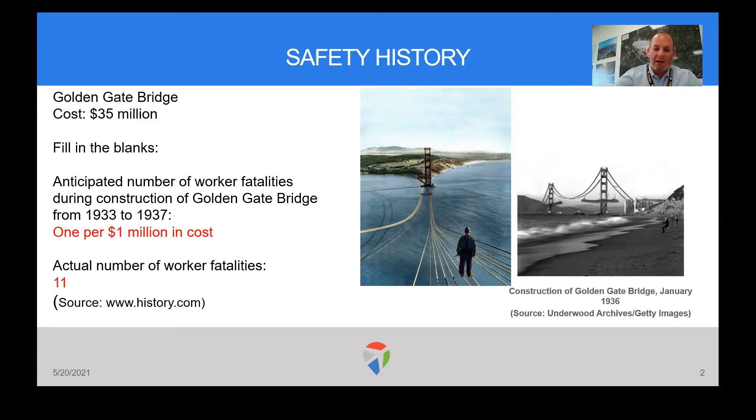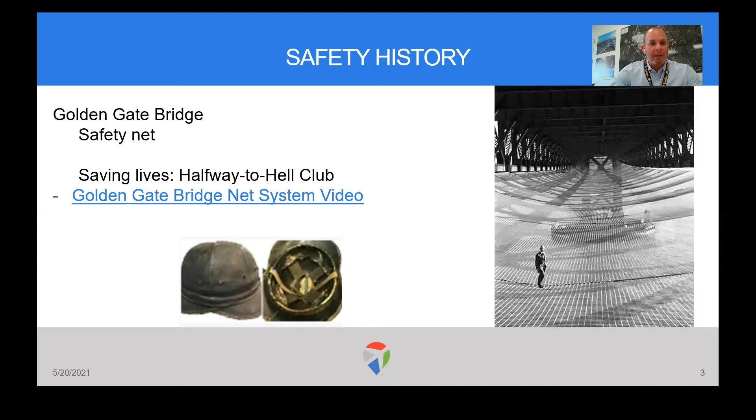And how they did that was the owner, a guy by the name of Joseph B. Strauss, made it a top priority to make sure that safety was implemented on his project. He did two key things. Number one, he implemented the use of a hard hat. This is the first construction project ever to use a hard hat during construction operations. And also he implemented a net that went the entire span of the Golden Gate Bridge, and that net saved many, many lives during the construction process.

Let's test your knowledge a little bit. I want everybody to take a second and rank these 6 items. What is the average rank of priority given to each of the following criteria by architects and design engineers? Take a moment and think of or write down your answers. Is it A, quality? Is it B, end user safety? Is it C, cost? Is it D, schedule? Is it E, aesthetics? Or is it F, construction safety? I'll pause here for a second.

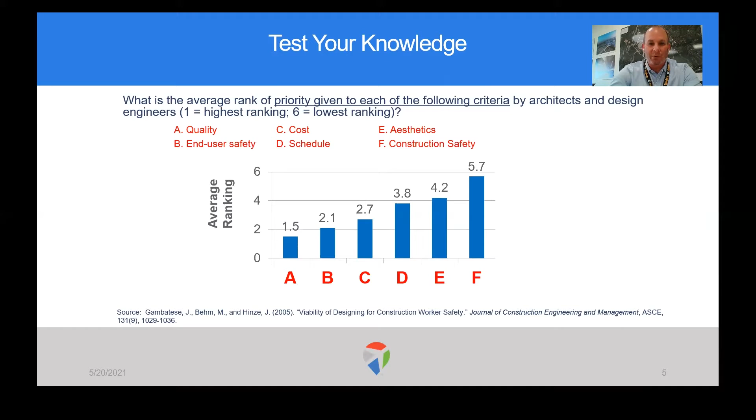Okay, the answer is easy. It's A, quality is the highest priority, and the last, number 6 on the list, was construction safety, which was the lowest priority considered by architects and design engineers.

What we're here to talk about is prevention through design and moving safety upstream. How can we think outside the box? The definition of prevention through design encompasses all the efforts to anticipate and design out hazards to workers in facilities, work methods and operations, processes, equipment, tools, products, new technologies, and the organization of work. We want to make sure we look at safety differently on our projects.

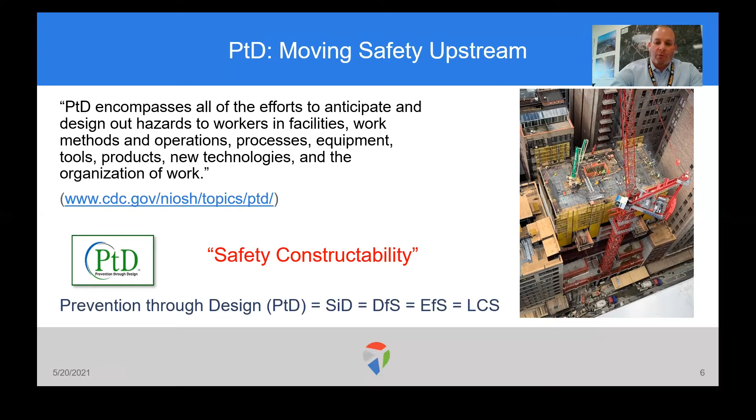Looking at prevention through design, I like having the first example, Thomas Jefferson's home in Monticello, located in Charlottesville, Virginia. On the roof of this building Thomas Jefferson actually implemented a handrail back in 1782. That is a very early version of prevention through design, one that we could get a lot of use of on all of our projects today. And he had the forethought back in 1782 to implement that.

This is an important diagram. I've worked 25 years in the environmental health and safety world for construction. Typically, in my past life, we wouldn't get called out onto the project until we were in the yellow, the 2 to 3 years of construction operations. The fences would go up and you'd get a call and say, hey, Jason, it's time for you to go out to the project. We're starting construction.

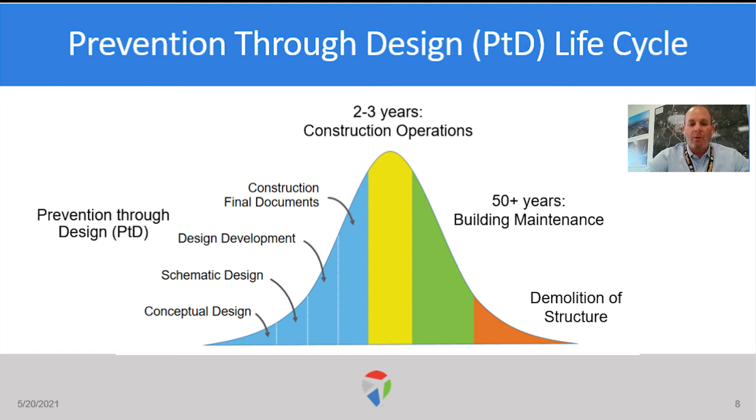Realistically, and thinking outside the box, this has to be a holistic approach. How can we get involved with our design teams and our architects very early on, as far back as the conceptual design, to start having conversations, to start looking at the safety of the construction workers who are building the project and the 50+ years that building has to be maintained? We can get involved in the conceptual design, the schematic design, the design development, and lastly, the final construction documents. It's all about having conversations very early on.

My second example. I worked for a company in my previous life that was based out of the Nordics and Europe, and they have a much more robust prevention through design program in place. These three pictures show hand placing concrete and the hazards that present themselves. You think about housekeeping. That's the obvious hazard. You look at slips, trips, and falls, same level. If an employee is going from location A to location B, he's walking in a hazardous condition.

You look at any type of back injuries from all the lifting you have to perform to hand place concrete. You're looking at pinch points, the hazards with using tools, and dropped objects, things that fall off the building. As you can see here, when I was working for that company and looking in their prevention through design manual, on page 1 it said smart concrete forming methods shall be utilized on all projects.

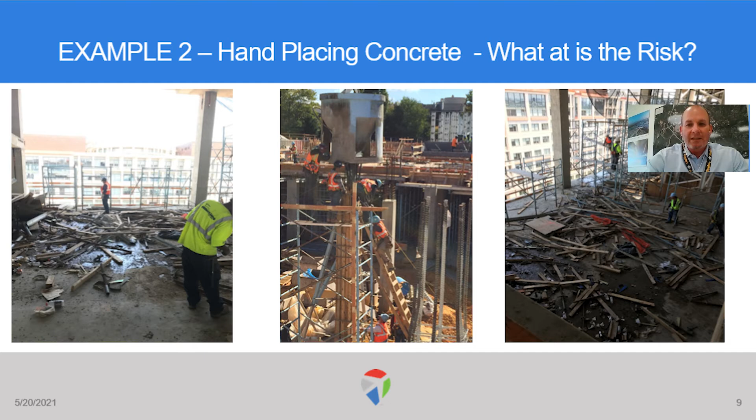And that's an eye-opening statement, and it's something eye-opening that we can take as an industry. This is low-hanging fruit that we can try to implement. And I go into having tough conversations. And about this one particular topic of smart concrete forming methods, what are the 3 key hurdles? 1, not dictating means and methods. 2, the legal liability. And 3, not having this written into our contract with the architect teams.

And the first one, not dictating means and methods, we're not trying to tell you what to do, but we can use our experience to educate, teach, and coach to make them make that decision, either the concrete contractors or the general contractors, or just using all of our knowledge to have them make the right decision to protect the worker. And that's what this is about.

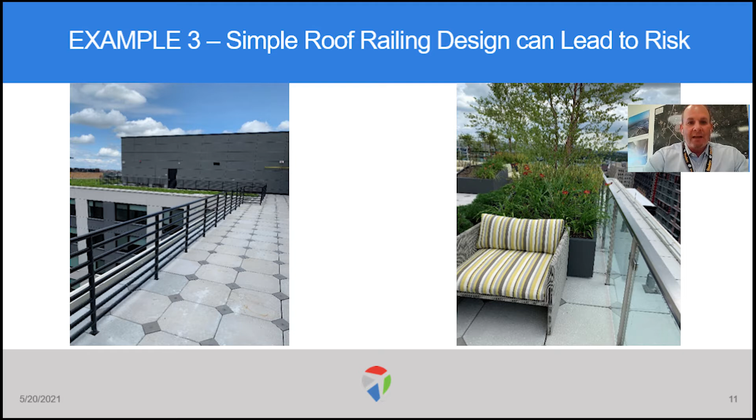Another example is the simple roof railing. Look at the hazards that are presented with a simple roof railing. The picture on your left is a residential building. And what's that handrail look like to you? What's that handrail look like to a child? It's a ladder. It's called a ladder type guardrail or a ladder type handrail. So obviously that is a hazard presented and something that could be looked at and designed out very early on.

The picture to your right, also, and I think looking at little kids, and I start thinking of little kids and my children, what's that look like to a child? It looks like you climb up on that planter and jump over this rail. This is the same building. It's 12/13 stories. This was in downtown Washington, D.C., but these are hazards that could have easily been designed out with an early conversation.

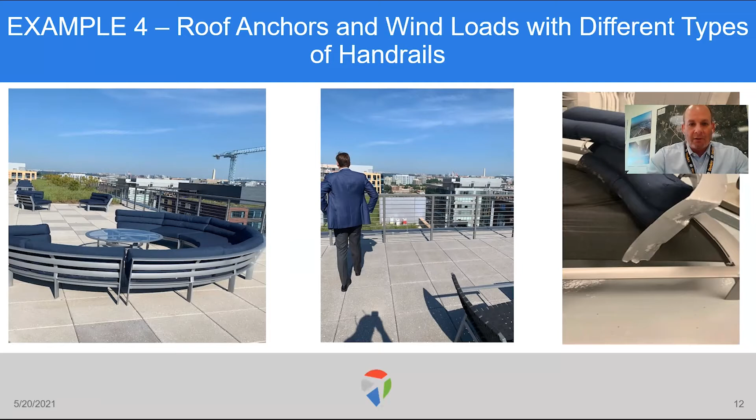Also, what we found was, looking at this ladder type handrail that they had on this building as well, it increased the wind load coming through or off that roof because the wind blew through that rather than having a glass rail where it would blow over. But again, another simple conversation could have eliminated this risk.

This is something we see all the time. And with ladders last and companies eliminating ladders on their project, looking at the ability of floor design to support construction live loads. You got to think of your buildings. How can you have a more robust floor slab? And this floor slab that can be used, or you can put equipment on that and you wouldn't have any concerns.

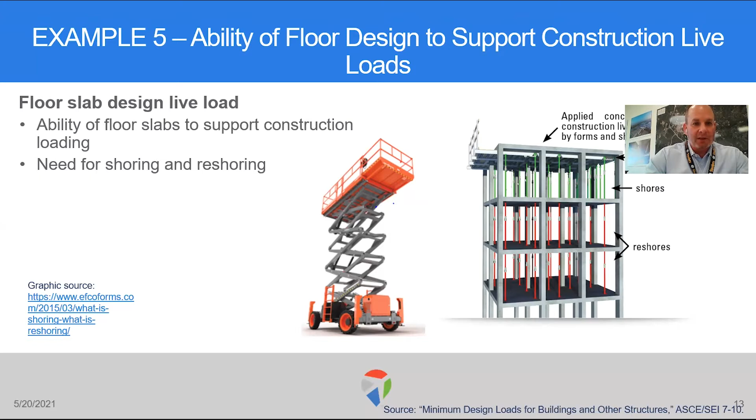So during our prevention through design workshops that I was part of with Dr. John Gambatese, some of the questions, this was brought up a few times by superintendents in the field, like how can we make more robust floors? How can we support the equipment we're going to put on each floor and make sure that we are thinking this through in the very early phases. But again, another piece of low-hanging fruit that we can have a conversation with our design teams.

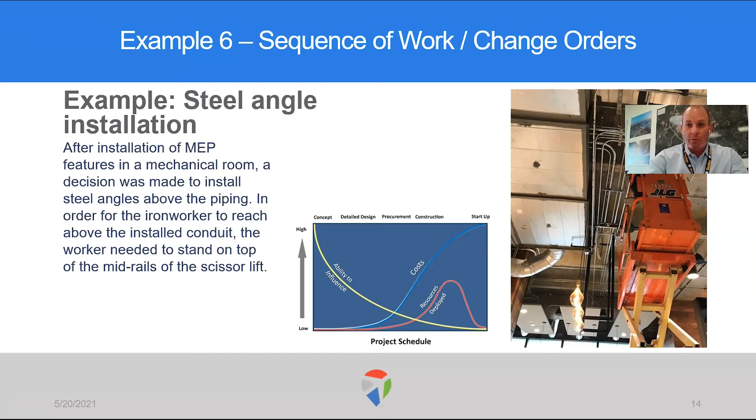How about sequencing of work and change orders? And how many times in the field have you seen workers go up on mid rails of scissor lifts? Basically, it's either because the sequence of work wasn't right or there was a change order. And you look at the ability to influence in the smaller photo here. When a change order comes into place, the cost is going to be elevated, and it's going to create that much more risk for the workers out in the field. So taking a good hard look at sequencing of work and also considering change orders and the hazards they present to the workers.

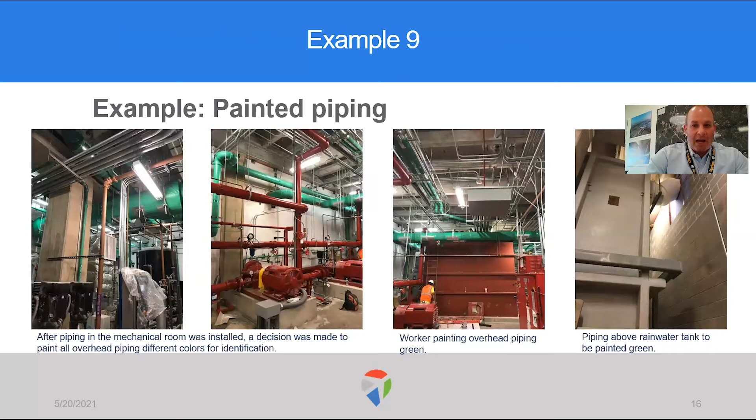The next example is painting pipe. And you think about painting pipe, yes, that is a prevention through design method. But if they ask you to paint the pipe after it's installed, that's the exact opposite of prevention through design. That is creating risk for your workers. So looking and considering, this was a change order that they decided to paint the pipe after it was already installed, and it created immense amounts of risk for the workers.

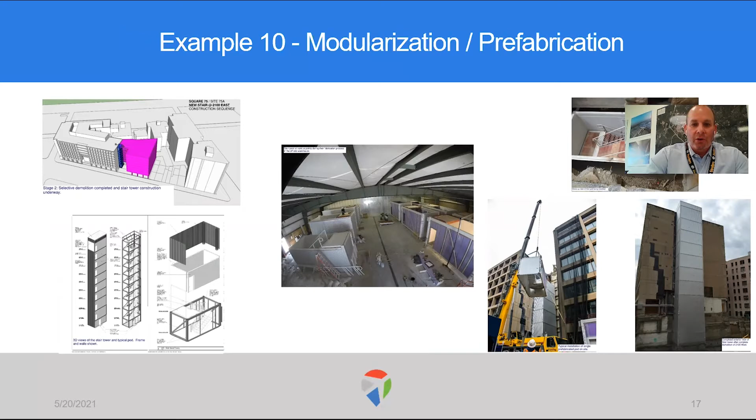Another great prevention through design method is modularization and prefabrication. This can eliminate risk when you construct something off site and then bring it to your structure and implement it. This is one of the key elements that they use over in Europe. It's something that we should consider on our projects.

Okay, dropped object protection. If you're going vertical, there is a lot of risk generated by dropped objects. And how can we take a good hard look at that? If you're using the engineered forming methods and engineered forming techniques, using the Doka forms, the Peri forms, you can come up with a cocoon system to eliminate, number one, workers being exposed to the edge, and number two, things falling off your building. These systems work. Again, it's not for everything.

If you're building a 10 to 15 story building, is the cost worth putting in a cocoon if you have that money? Yeah, but when you're going seriously vertical, 25, 30 stories and up, a cocoon system should be strongly looked at. It can help speed up production. It can eliminate things falling off the building and also eliminate workers in their leading edge work.

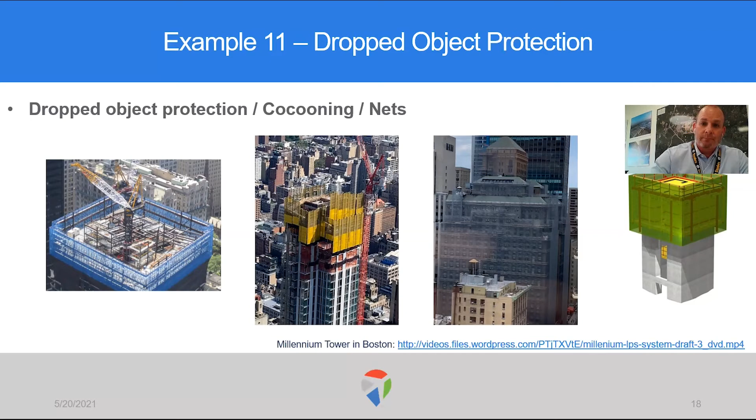Okay. Looking at dropped objects and what else can you do? Looking at leading edge protection, if you can't use a cocoon system, the leading edge protection, number one, it's safer. Number two, it's environmentally friendly. Number three, it's sustainable. And four, you can market it. You can paint that. You can put your company logos on these fences.

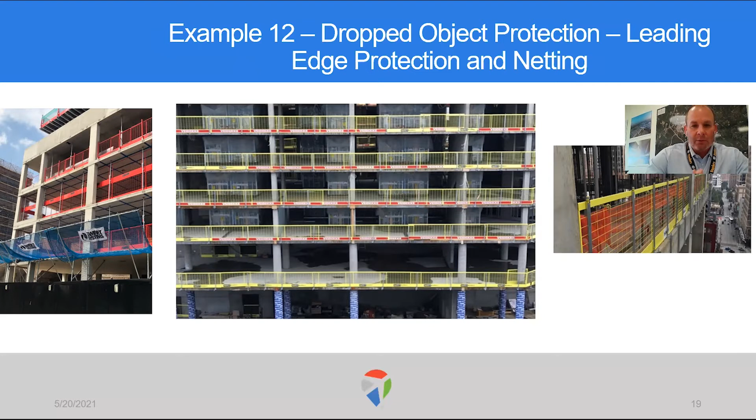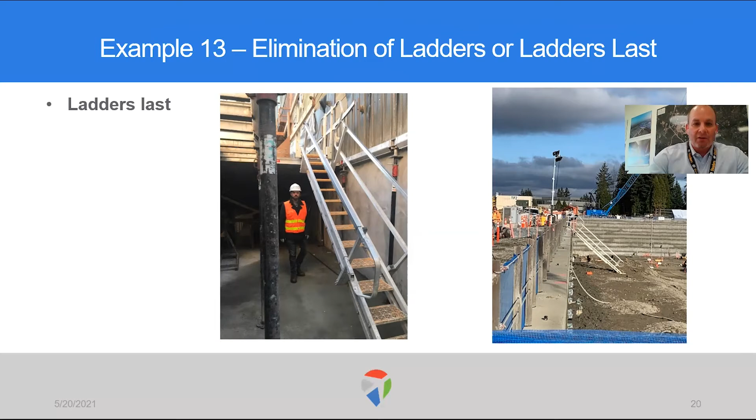Leading edge work, this picture in the middle was taken in Poland. You think about Europe, and they are much more advanced in the safety movement than we are here in the United States, believe it or not. But I consider this also an early conversation you can have with your team, and also looking at ladders last. A lot of companies are looking at this, elimination of ladders. It can be done, and it does reduce the hazards that your employees are exposed to.

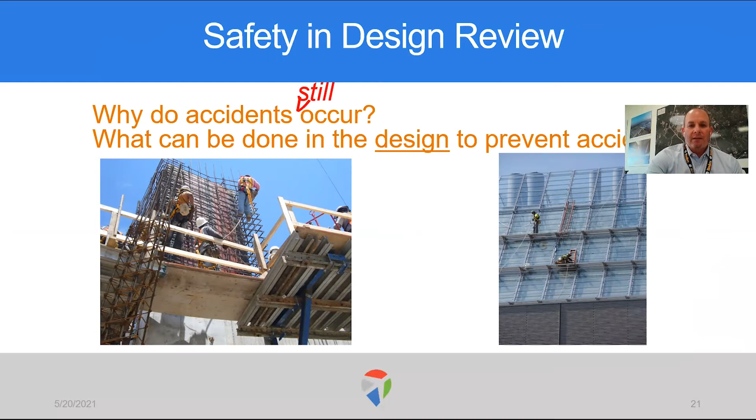And we look at safety in design reviews, why do accidents still occur? And what can be done to design out and prevent accidents? Some of the simple steps of implementing prevention through design. One is educating, teaching, and coaching. Two is the right place, the right time, having the right resources.

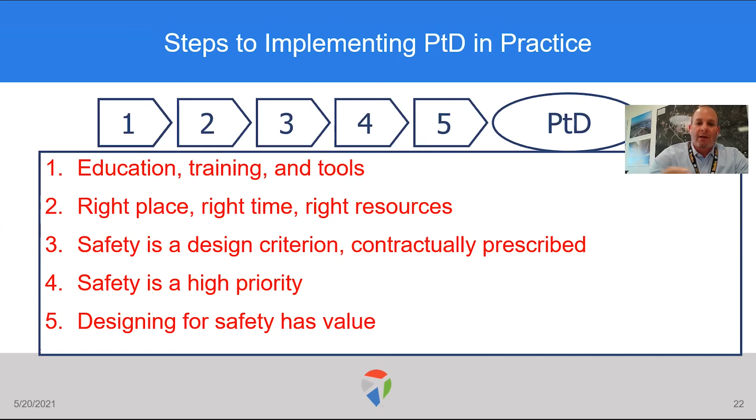Three, making safety and design contractually prescribed to the architects and design team, and having safety as a high priority in the terms of your architects and design teams and your actual teams that are going to build your building and put the structure together. We also have to look at the fifth element, designing for safety. It has value in communicating that to everybody. That is where the teaching, coaching, and instructing come into place.

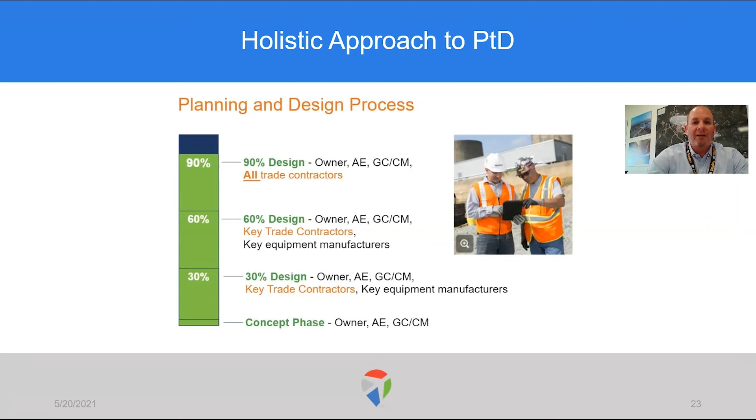The holistic approach to prevention through design, I refer to it as very similar to LEED, where you get the key stakeholders who have meetings at set points throughout the project. Having that continuous communication and these continuous meetings with all stakeholders along the way. You're looking at the 30% design all the way through the 90% design. We have to get the owners involved. We have to get the architects involved. We have to get the GCs involved and start having these conversations. And that's how prevention through design works.

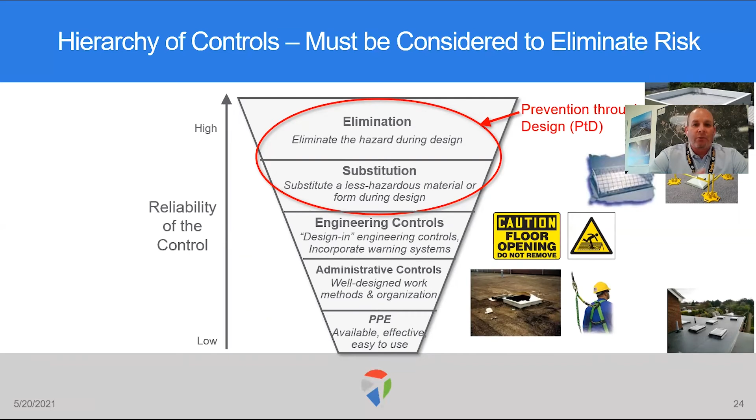The hierarchy of controls, we're looking at prevention through design as the elimination and substitution of risk and elimination and substitution of hazards. And I'm sure you're going to see a lot of this throughout the day. But we have to look at the hierarchy of controls, knowing that PPE is our last resort. We want to do everything in our power to eliminate risk or substitute out risk.

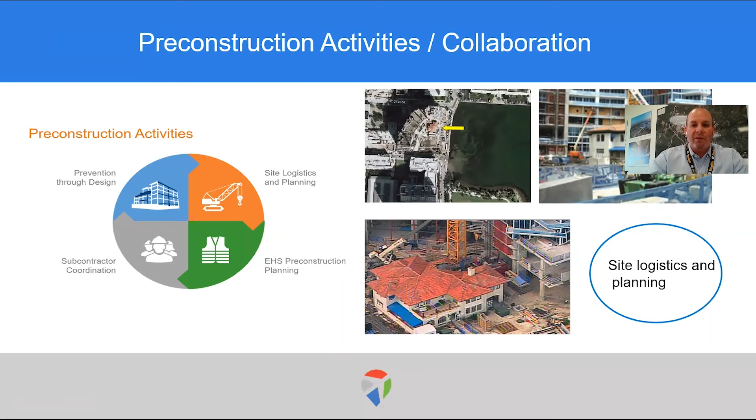And looking at our pre-construction activities, there's 4 key elements. One, we know prevention through design through our conversations today. Also looking at site logistics and planning, that's something else that falls into the prevention through design bucket, when we're having these conversations with our project teams.

Okay. Now, I work at the Allegheny County Airport Authority, and we're in the process of getting ready for construction on a $1.4 billion job. I got hired back in April of last year, and I want to talk about the lessons learned during COVID for airport design, and what prevention through design looks like. Here are a couple of things.

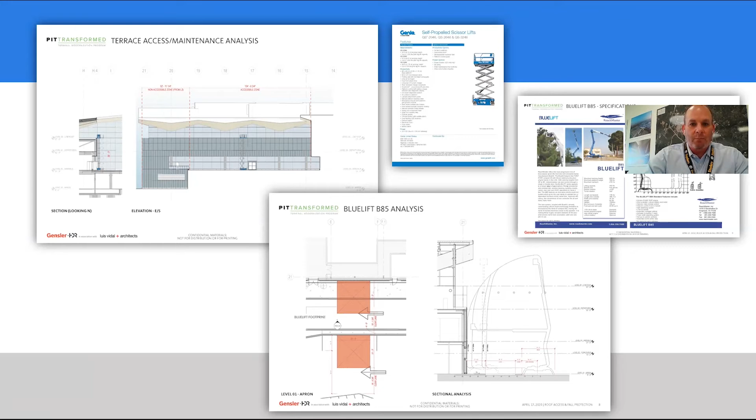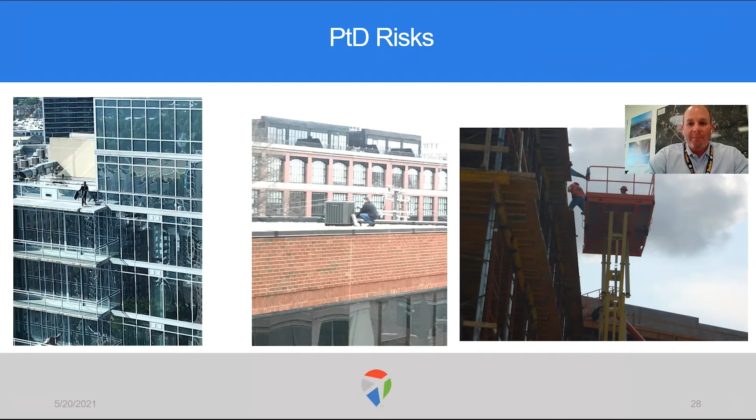When I first came on board, they were talking about these outside terraces, and architects and design teams were talking about using a scissor lift to access those points for maintenance. And we're like, whoa, we can't do that. That is against all prevention through design methods. So we have to look at having a doorway, having a hatch, having some point of access other than a scissor lift. If you look at these 3 photos, the photo to the right is the exact reason why. We say 100% fall protection between the lift and the building, and you could do it, but I know that never happens. So we have to eliminate the possible exposure of our workforce.

And in this photo, we have a rolling roof on our structure, and we worked together with the design teams to put horizontal lifelines everywhere on this roof. So as soon as the employees got through a doorway onto the roof, they had the ability to tie off with the cable grab system. Through these normal conversations, we were able to implement this process.

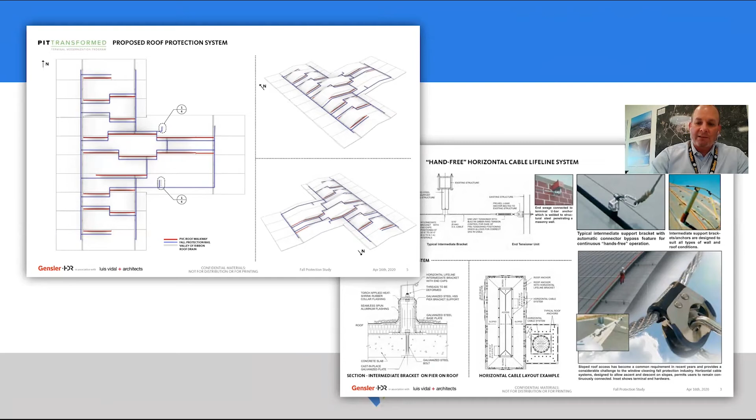Now you got to look at the airport, and we are the first airport designed and getting ready to build in the post-pandemic world, which is very challenging and very eye-opening. When we first started this journey, and I got hired on it in April, the design was basically baked already. So we had to take a step back with COVID and look at our now, near, and next priorities of what we can do to protect not only our current workers and all of our passengers at Pittsburgh International Airport, but also the future and our terminal modernization program.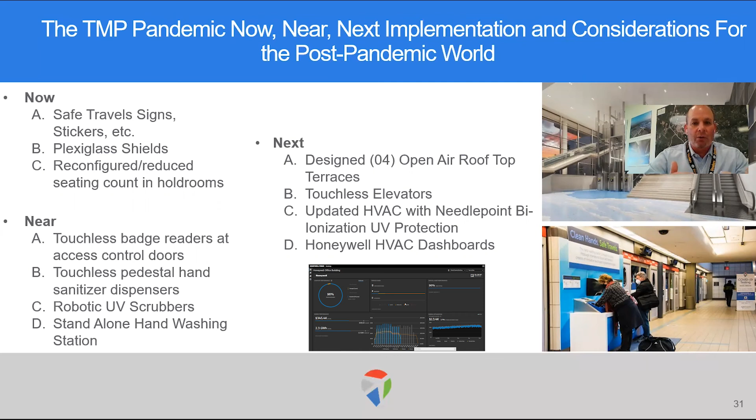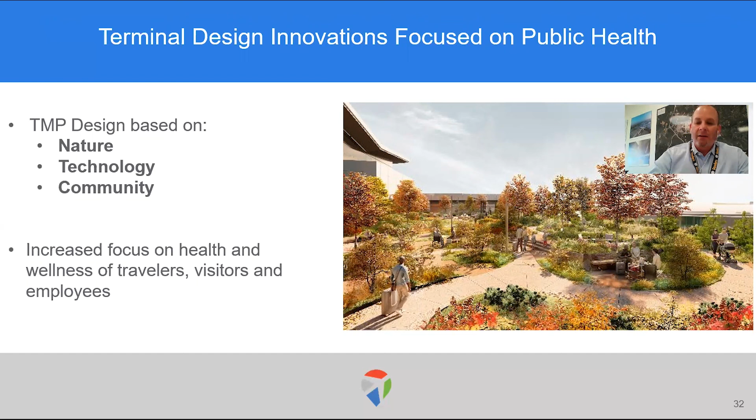This is our open air rooftop terrace, one of the 4 - this is the rendering. We really want to look at the nature of Western PA and incorporate that into our design. We're looking at technology, how we can be very innovative, and we want to have an increased focus on the health and wellness of travelers, visitors, and every employee. We want to make sure that is top priority of our future terminal.

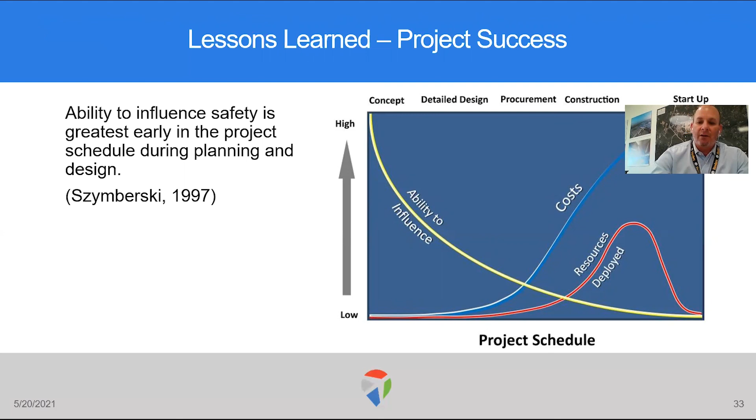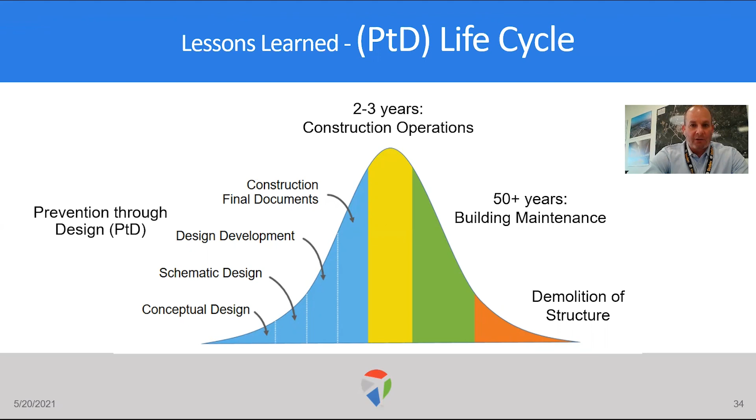As you saw earlier, our ability to influence goes way up in the concept and design phase. When we get into design detail and procurement, it gets a little too late. Our ability to influence is to get in early. Our lessons learned on this project, going back to this picture, is that we have to have conversations very early on. We have to engage with our architects and design teams as far back as we possibly can. Once this project reaches conception, that's when you start having these conversations. We have this holistic approach and open conversations with our teams, so our construction projects are a lot better during construction, operations, and for building maintenance.

Our key messages for the TMP and the $1.4 billion project we have coming up - at the end of the day, we do this for our families. Our children, our loved ones expect us to come home safely every day. We want to make sure that commitment is thorough, and that everyone truly understands our commitment to the environmental health and safety of every worker that steps foot on this project.

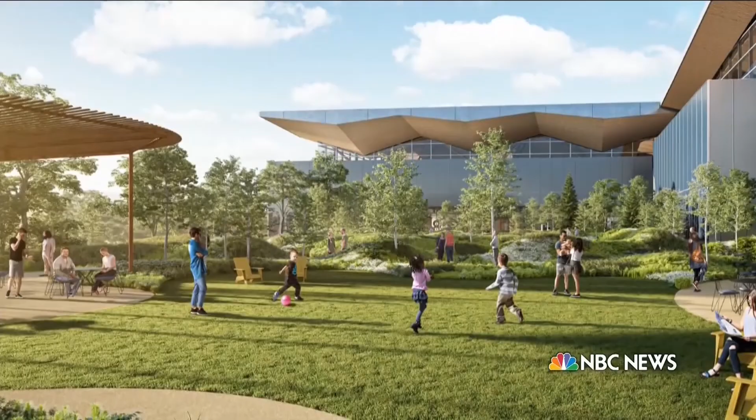Thank you. For travel to return to something like normal, people will need not just to feel safe, but to be safe. It will take everything from installing better air filters on planes to rethinking entire airports. We are building terraces so that once you get through security, you can actually go back outside for fresh air. Christina Cassotis is overseeing construction of a brand new terminal at Pittsburgh International. And we're working on indoor air quality monitoring so that we can monitor in real time the air quality in each space in the terminal and adjust it if needed for crowds, airflow, etc. It's a glimpse of what's to come.